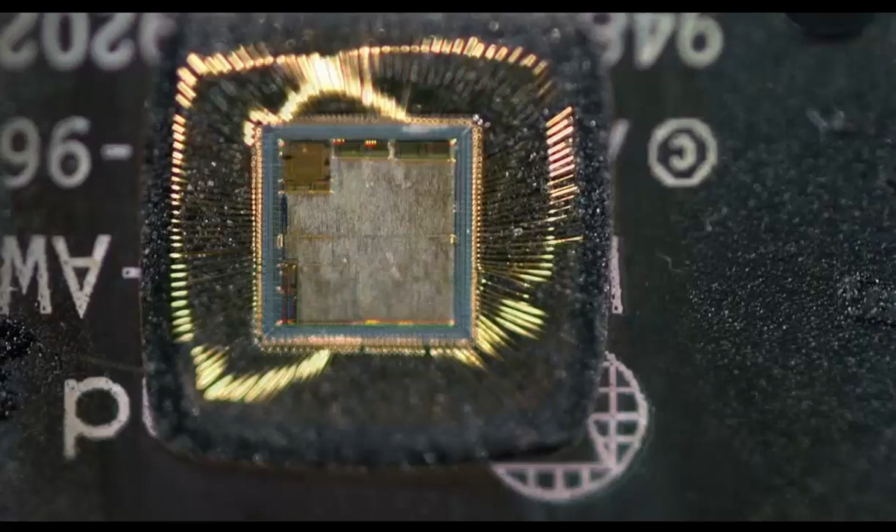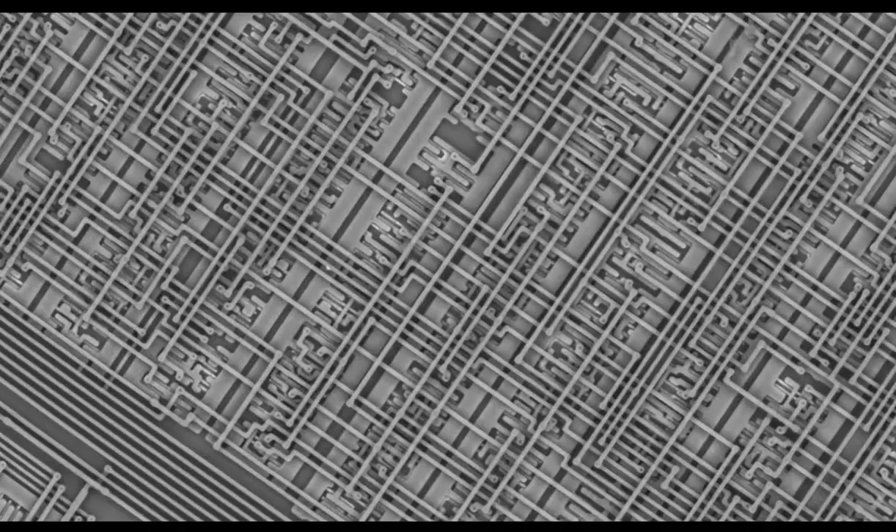In integrated circuit manufacturing today, engineers need to ensure the polycrystalline lines on the wafer are perfectly straight up. There are millions and millions of these tiny lines within a square millimeter area, and these billion-plus lines are created altogether in a plasma chamber. Today, we will introduce an experiment method to find the best equipment settings: the method of response surface.

Reactive ion etching is a microchip silicon wafer etching technology used in microfabrication. It uses chemically reactive plasma to remove patterned silicon dioxide film deposited on wafers. The plasma is generated under low pressure vacuum by a radio frequency electromagnetic field, with chemical gas vapor injected in.

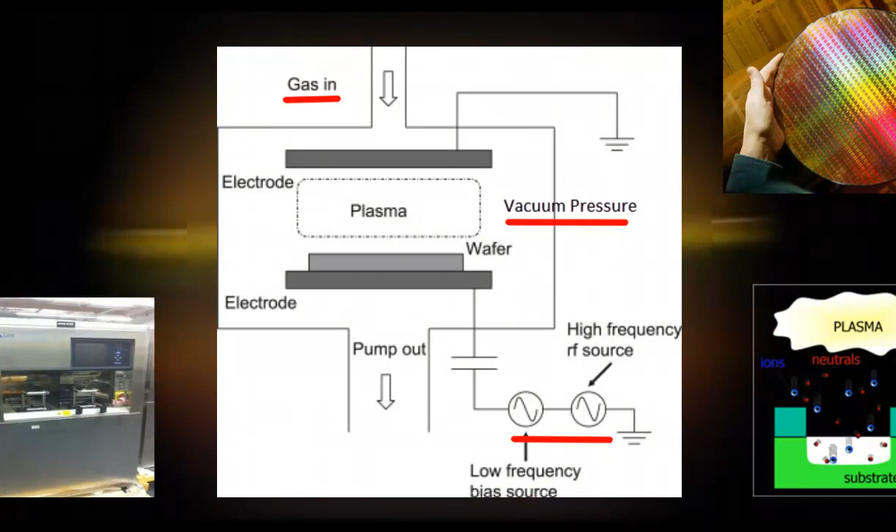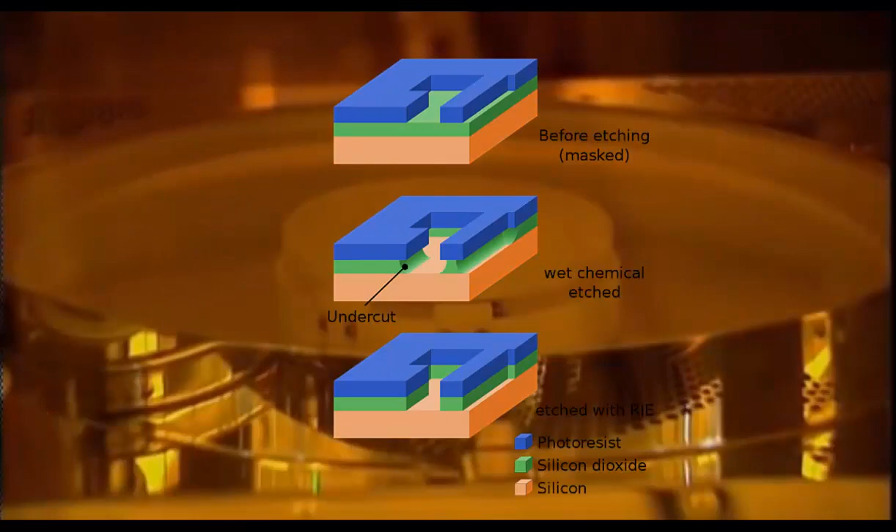The right combination of radio frequency electric field power, the pressure of the vacuum, and the hydrogen bromide gas injected into the etch chamber are the key factors leading to high-quality silicon wafers. Engineers need to ensure the profile of the polycrystalline silicon gates is anisotropic. That is, the walls of etch lines should be vertically perpendicular to the substrate in all directions, anywhere on a wafer.

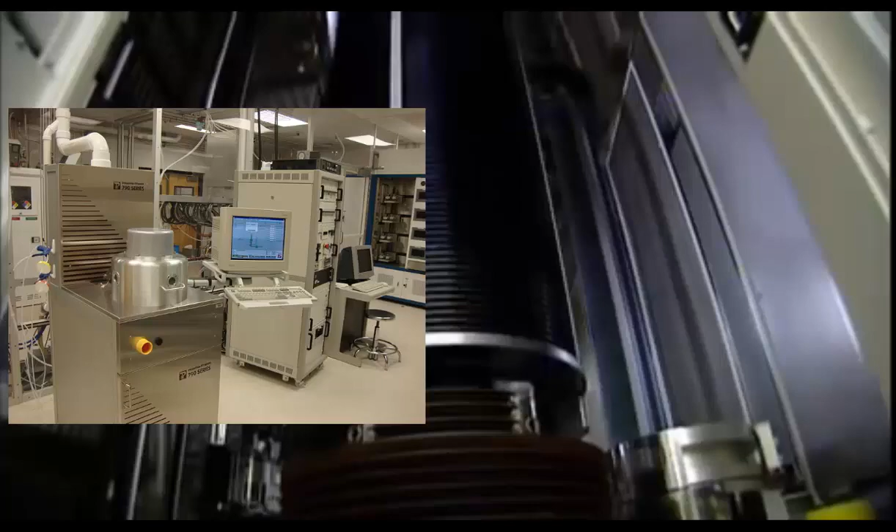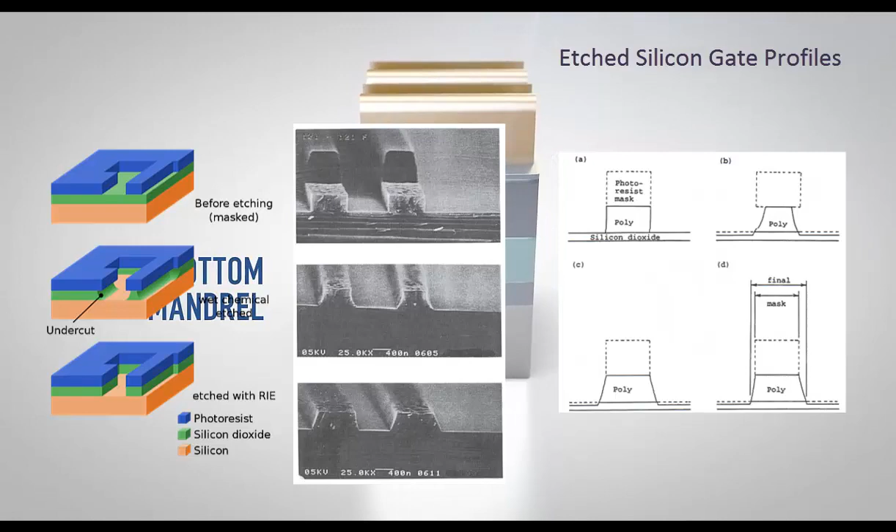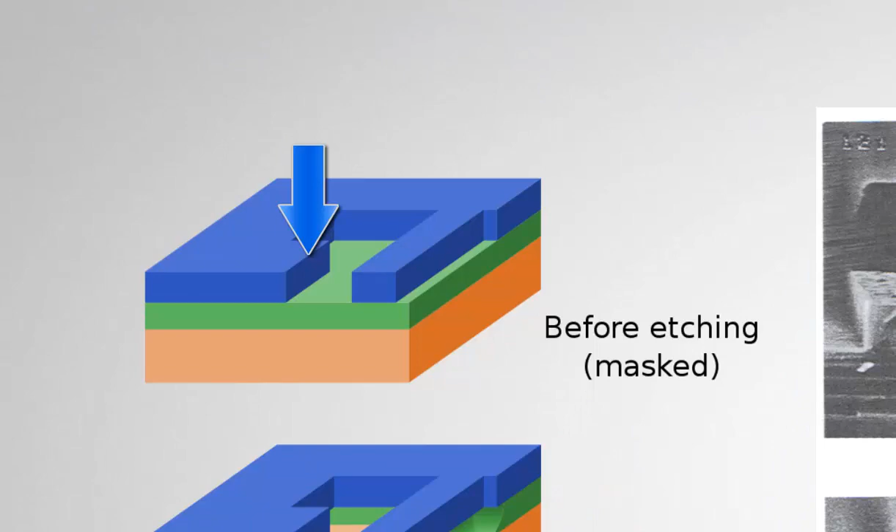Here are the cross-sections of finished polycrystalline silicon gate profiles under scanning electron microscopy. The ideal, or best outcome, is the top profile where the vertical walls are anisotropic, or straight perpendicular rising from the silicon substrate. This type of profile has the best electrical channel length distribution, and therefore the fastest microchips.

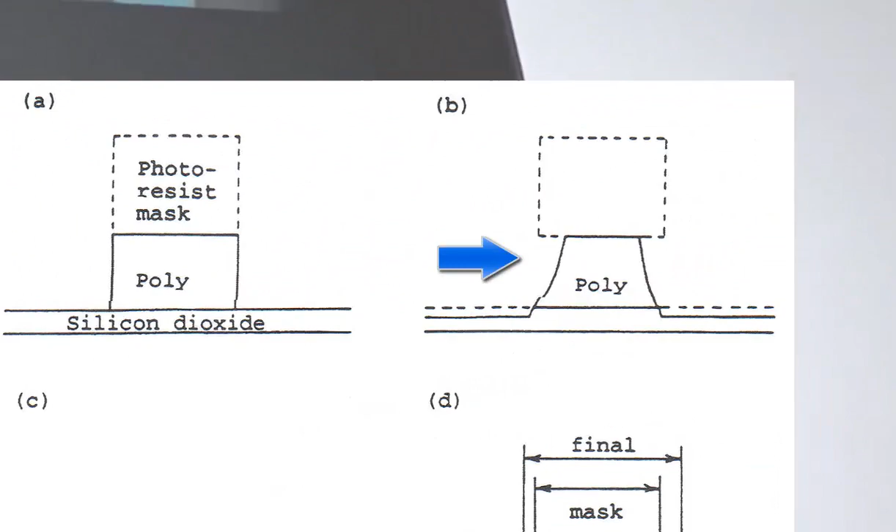The second profile came with severe undercut under the photoresist cover upon plasma etching. This undercut is a serious defect. The wafer may turn out to be scrapped if too much undercutting is present.

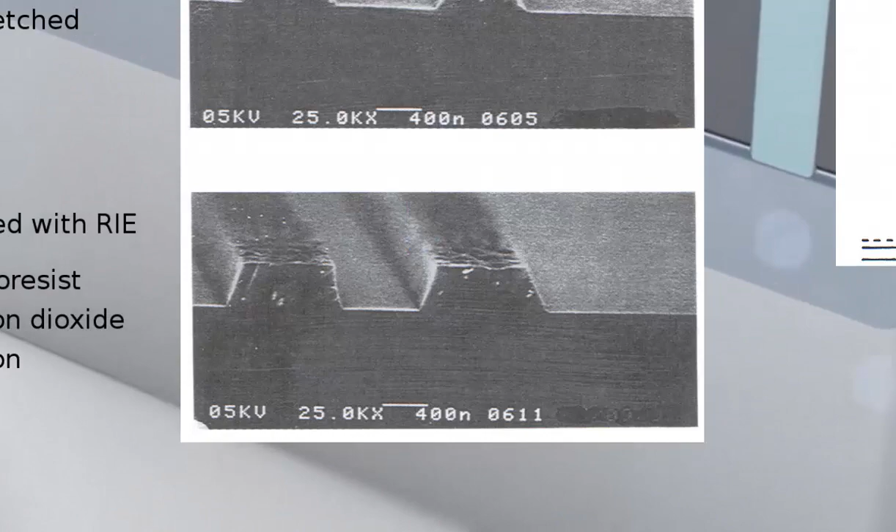The third profile has a wider base, or line growth. This defect is not as severe as the undercut, but the overgrowth should be avoided as well.

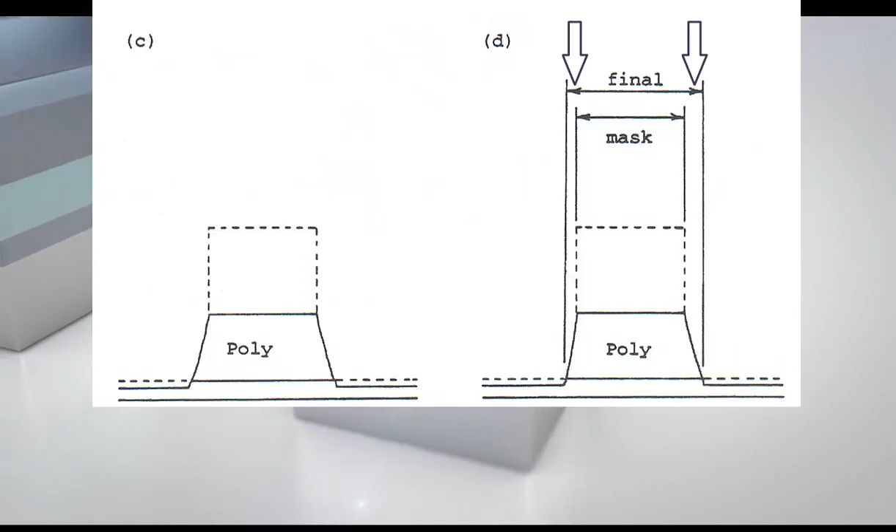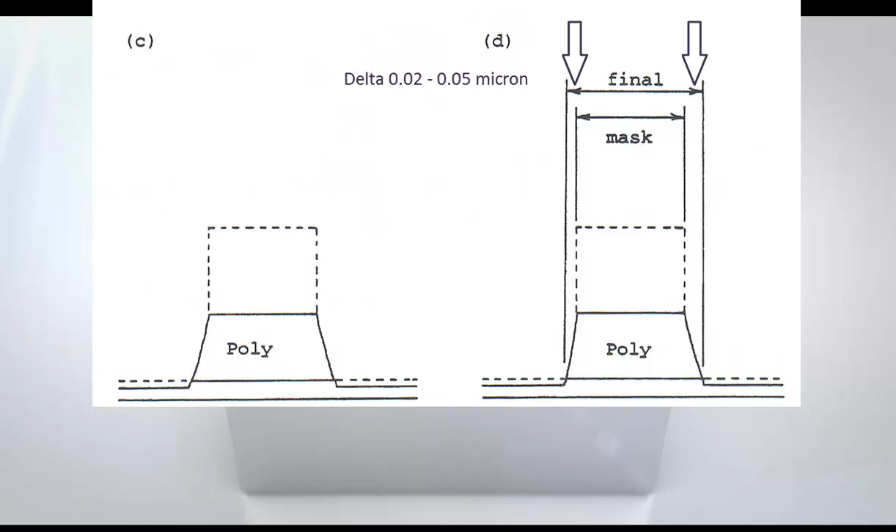The difference between the cross-sectional top and bottom line width is called delta, with undercuts as negative and overgrowth as positive values. In other words, engineers and researchers need to find the best etch equipment settings to achieve zero or slightly positive average delta values on a wafer. In practice, the ideal value is between 0.02 and 0.05 micron. Negative values are unacceptable.

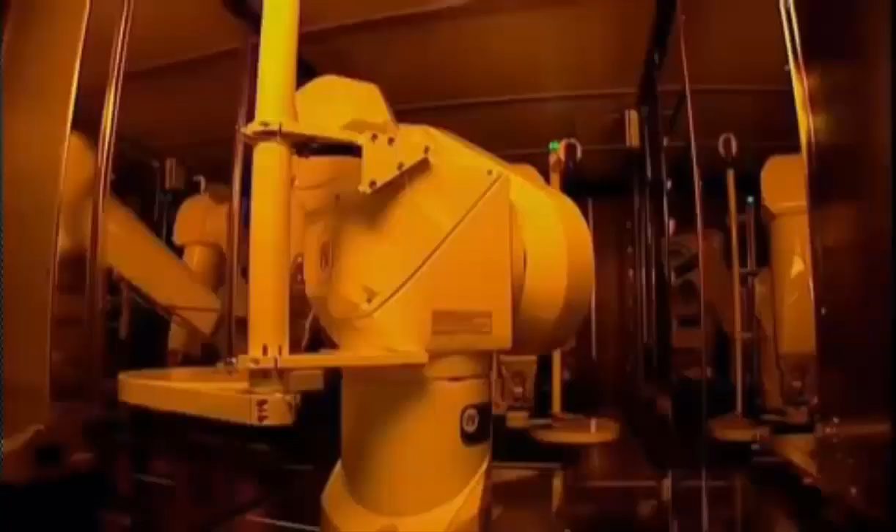Let's face it, if you do experiments, you need a design. Otherwise, you might spend a lot of time and money and may not even find a solution.

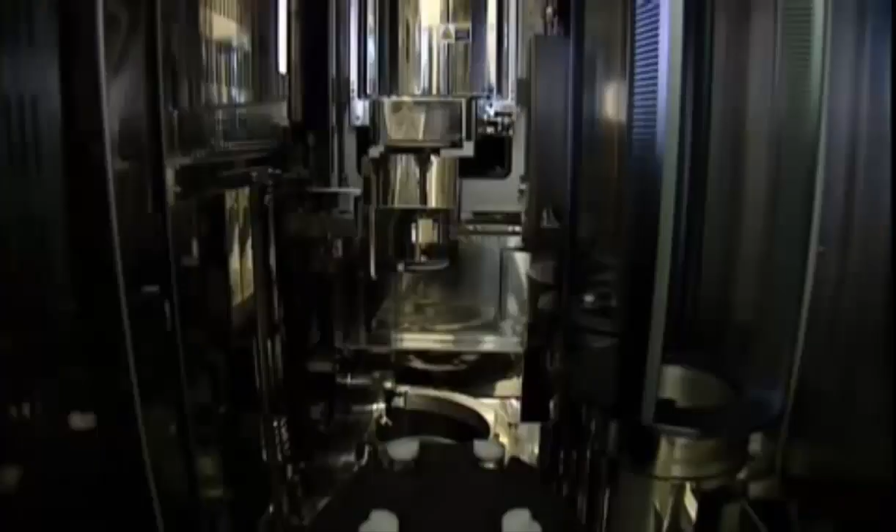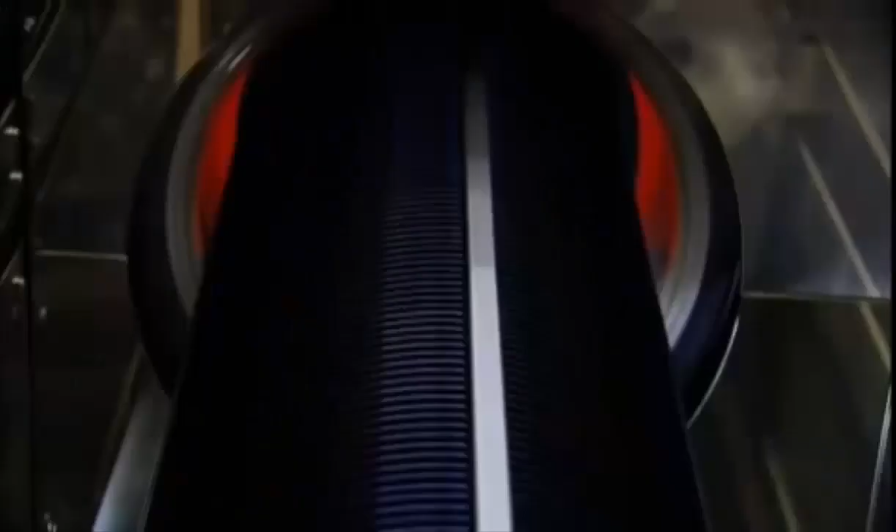Design of experiments, or DOE, is a systematic way to discover how physical factors impact outcomes. In practice, it saves a lot of research time because experiments are easier with existing lab research equipment than starting a theoretical research altogether. Almost any researcher can set up experiments, but not become an expert on something they only need once. The key here is how to do the experiment the correct way.

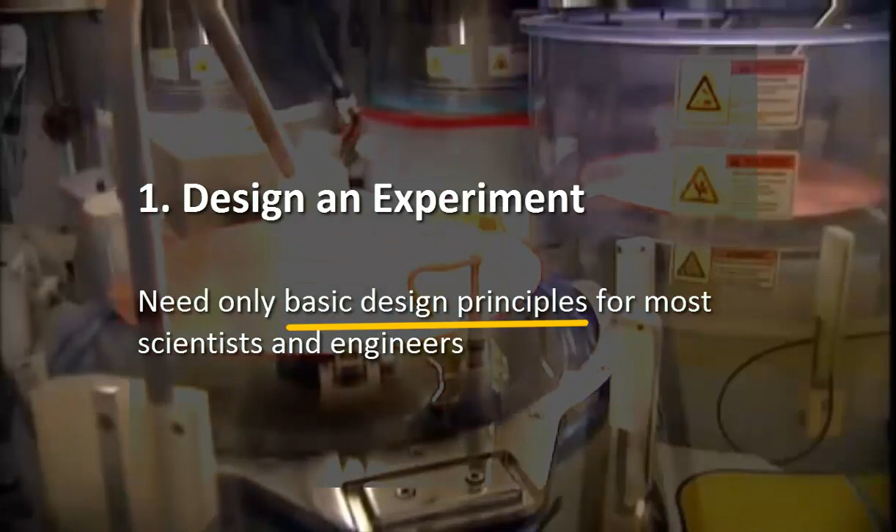There are two steps in an experiment study. First, design an experiment. Second, analyze the experiment data. For step 1, you only need to understand the basic DOE principles. There are computer programs today that help you design the right plan for you.

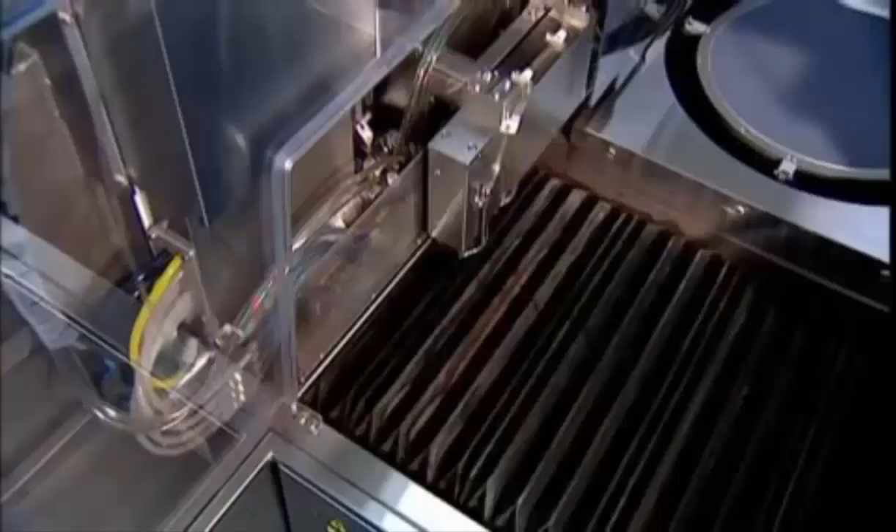For step 2, you will need some basic statistical knowledge and a good computer program to help you, such as R. Don't worry, follow my series of videos and you will gain these skills quickly. Analyzing experiment data is the same as analyzing any other statistical data. I will show you today how to accomplish this in R. We use R because it is open source and always employs the latest techniques, but you can use other computing tools of your choice.

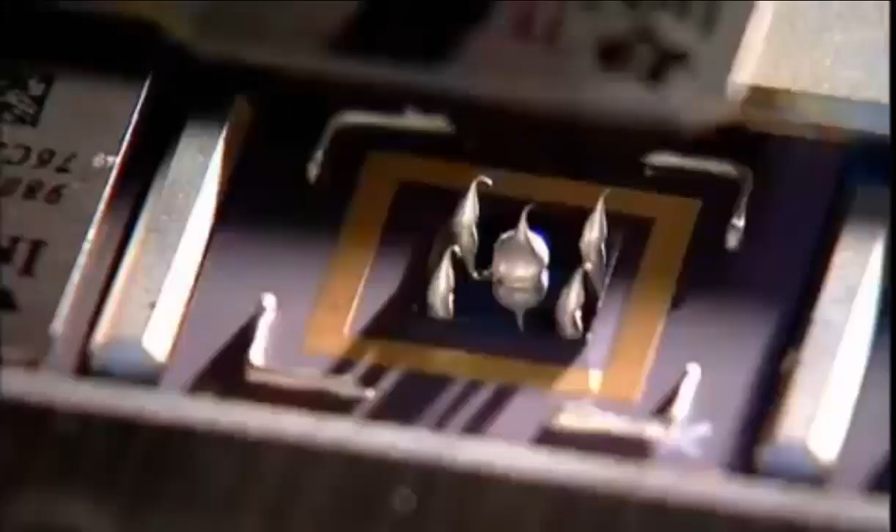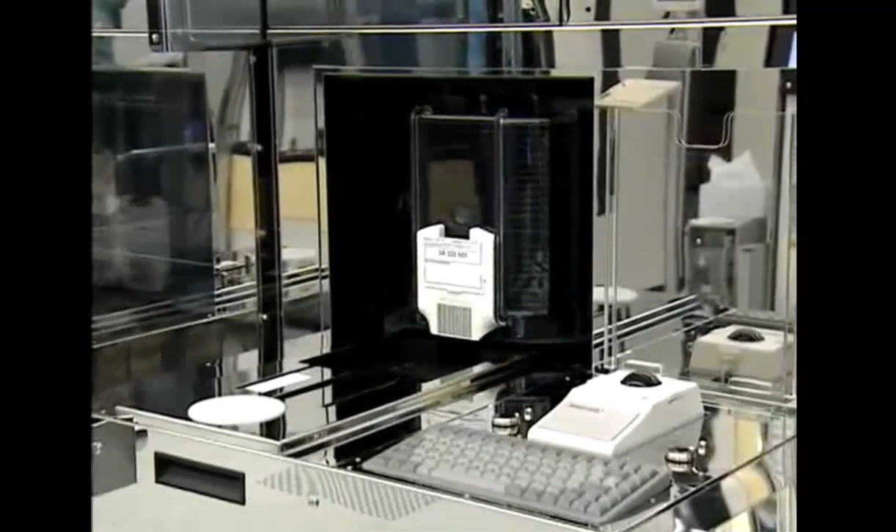Response surface methodology, or RSM, is a type of DOE. It uses a sequence of designed experiments to discover the best variable settings that lead to an optimal response or region. RSM usually starts with a first-order factorial or fractional factorial experiment to identify, among candidate variables, the ones that affect the response variable of interest.

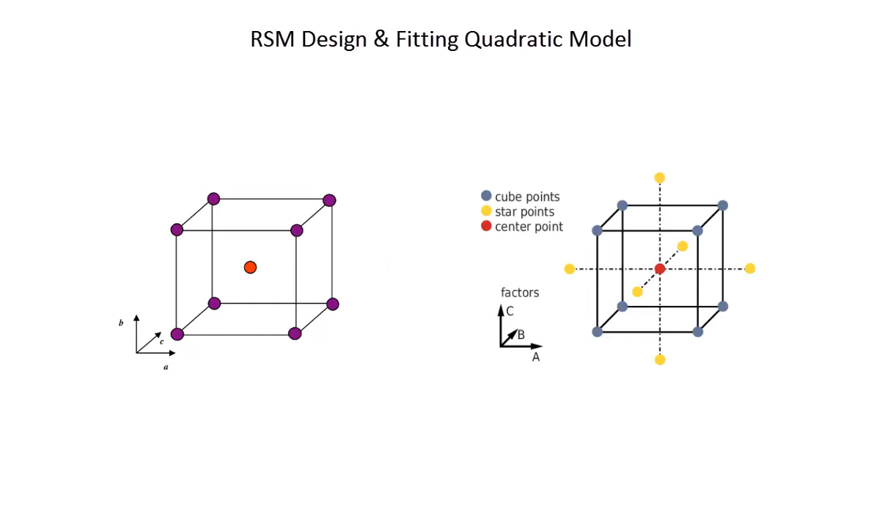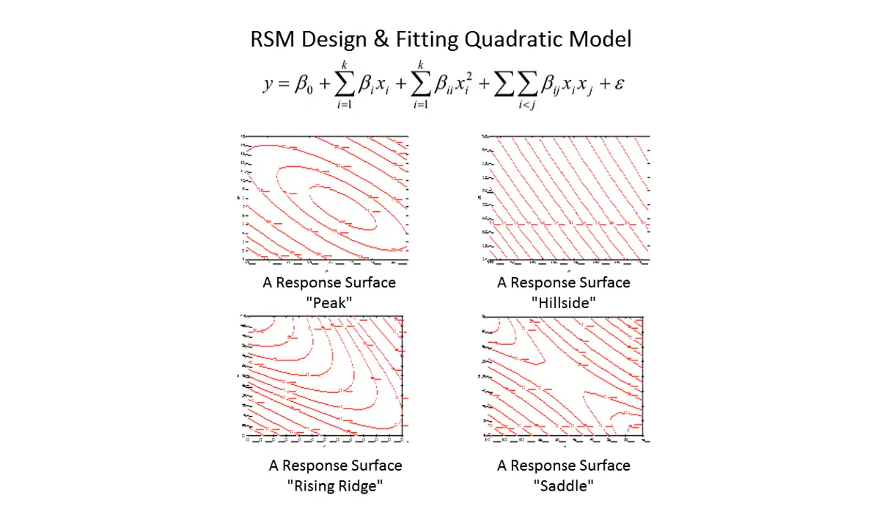Then proceed to a more complicated experiment design such as the central composite design, or CCD, where you find a second-degree polynomial model. We see here the fitted surface in the case of two factors. There are either peak, hillside, rising ridge, or saddle point.

Historically, RSM has led to huge scientific and technological breakthroughs, and is therefore considered a core industrial competency. The central composite design, along with the Box-Behnken design, are the most widely used designs for RSM.

CCD contains an embedded factorial or fractional factorial design with center points. Then, these designs are augmented with a group of star points to allow estimation of curvature. Let's take a look at this two-factor CCD design.

Engineers began with the full or fractional factorial experiment and identified two important factors, then augmented the experiments by performing on the star points along the axes. The star points represent new extremes for each factor. The combined settings become a CCD plan.

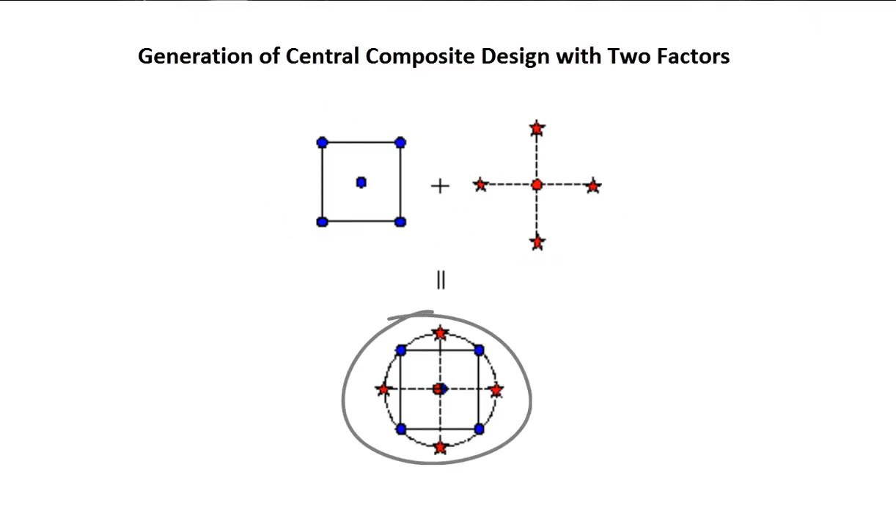Similarly, for a three-factor experiment, the final CCD is a combination of cube points obtained from factorial designs combined with star points. There are three important properties of the CCD.

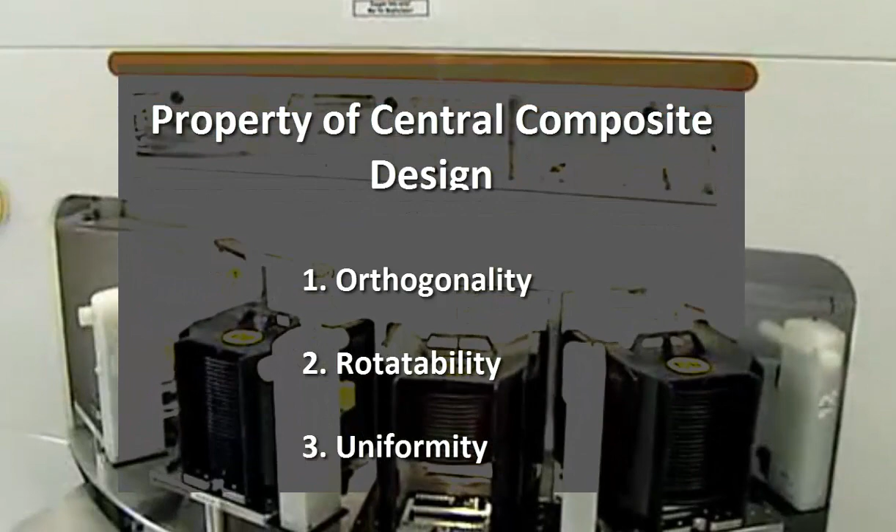They are, first, orthogonality - that is, the individual effects of all factors are estimated independently without confounding, with minimum variance, and the estimates are uncorrelated. Second, rotatability - that is, the design points are rotating about the center of the factor space. Third, uniformity - that is, the center points are uniform in precision.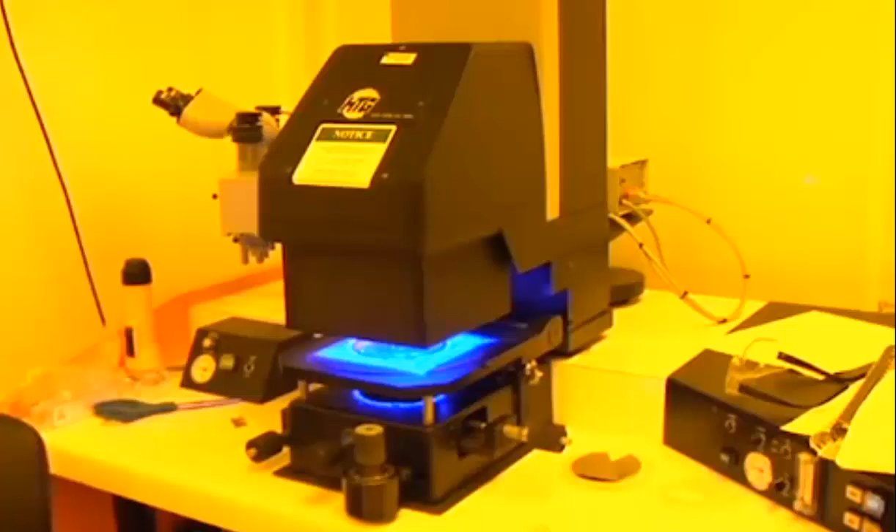For the wafer study, engineers have conducted factorial experiments and determined the factors that impact wafer line size delta. These are radio frequency electric power for the plasma, the pressure of the chamber vacuum, and the hydrogen bromide gas concentration injected into the vacuum.

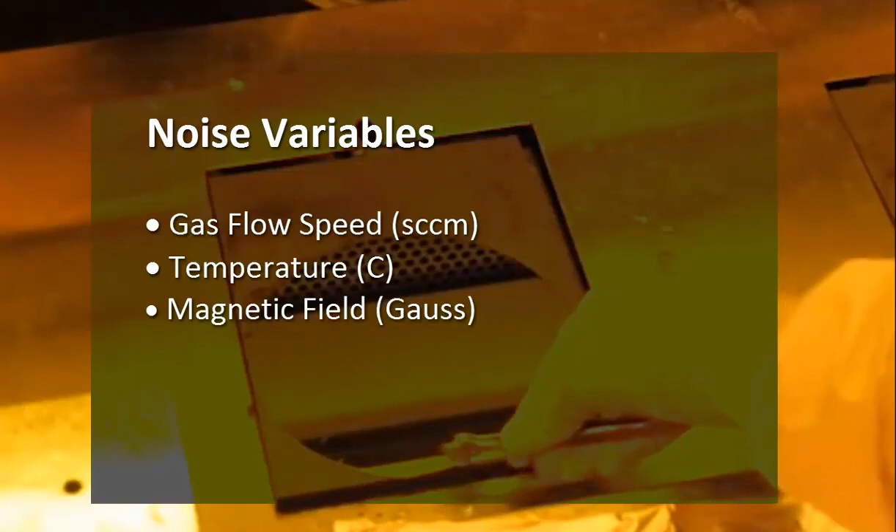Wafer feature density is also known to impact line size delta, but it does not interact with the other three factors. Other variables such as gas flow speed, temperature, and magnetic field are less significant, so will be treated as noise variables. Wafer feature density is a categorical variable; we use code 0 for low density and 1 for high density.

There is another factor, the feature proximity on a wafer, that is how close the features are positioned. For this solution, let's do all experiments on only the closely featured wafers. We will expand to low proximity wafers using a more complicated model in a future video.

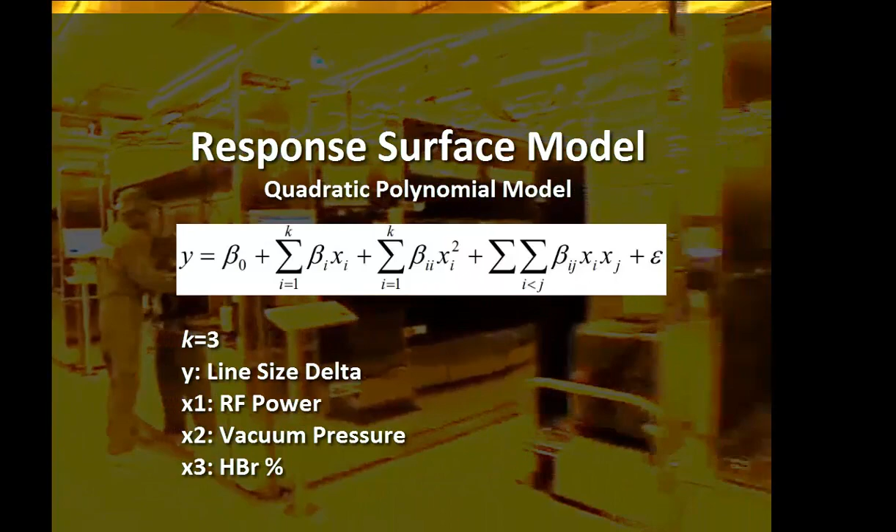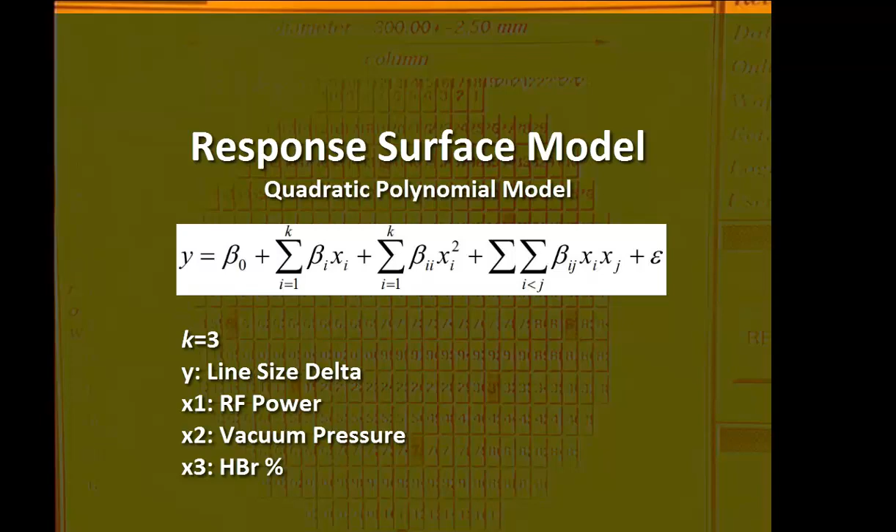The RSM model we intend to fit is the quadratic form model, with x1 as RF power, x2 the vacuum pressure, and x3 the hydrogen bromide concentration. We will repeat the design for wafers with high then low feature densities, and control feature density in the final model.

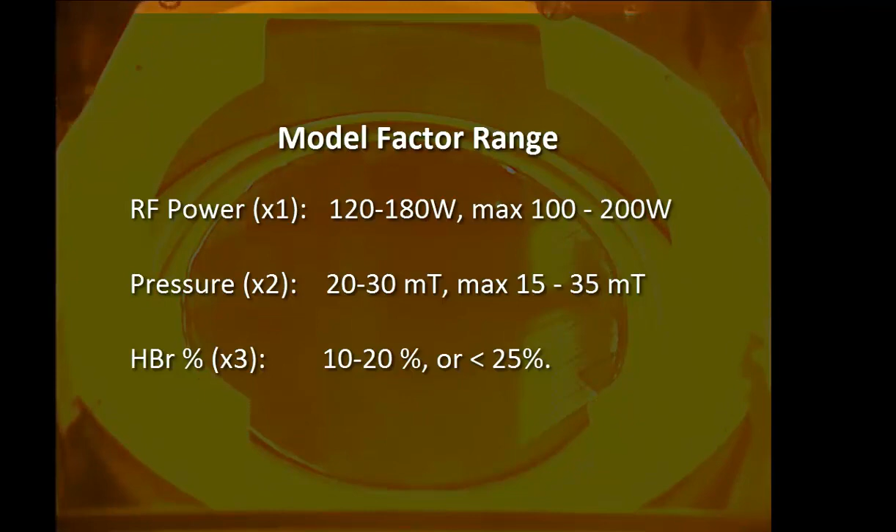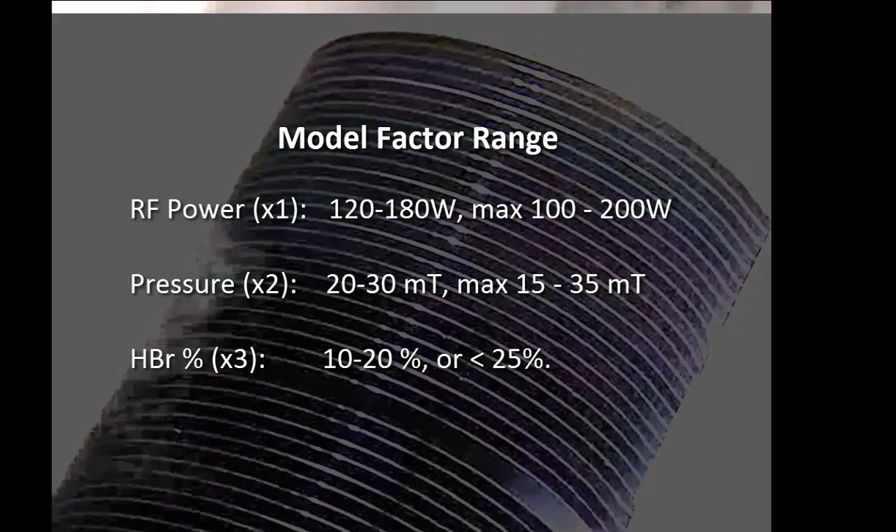The range of the factors are as follows. RF power between 120 to 180 watts, can be as low as 100 or as high as 200 watts at the extreme. Vacuum pressure is between 20 to 30 millitorr, can be as low as 15 and as high as 35 millitorr. Hydrogen bromide concentration should be between 10 and 20%, and will tolerate up to 25%.

We will create the CCD plan and analyze the experiment data using R. Let's open R Studio.

Step 1: we need to create a central composite design. We use the RSM package; if you have not installed it, download a copy from the R Cran repository. We can use the CCD function from the RSM package. We first specify a model formula, only needing to specify response and design variables, then the number of center points in the cube blocks and star blocks. As we run all in one block, we have 4 and 0 here, no repeats on the star block.

We need a rotatable plan. We also need to specify how the plan will convert the input variables from the original to the coded variables. To convert to coded -1, 0, 1 values, we subtract the mean from the variable, then divide it by half of the range. Yes, we want randomized run order - say true. We also want to run all experiments in one block.

Take a look at the final design. In each design, values of line size delta are missing. We will proceed to hand the plan to engineers to conduct the experiment.

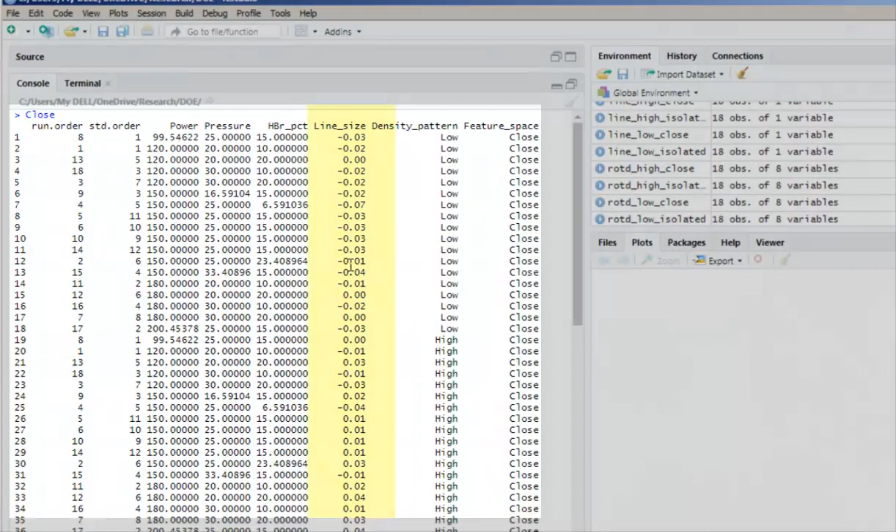Wafer lab engineers conducted experiments, saved data in the design plan column line size, renamed the dataset to close. We use the RSM function to analyze the collected data.

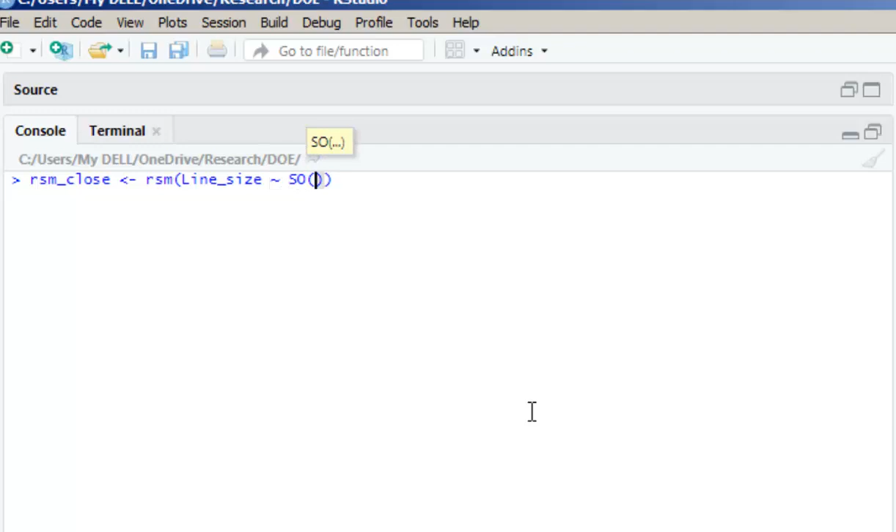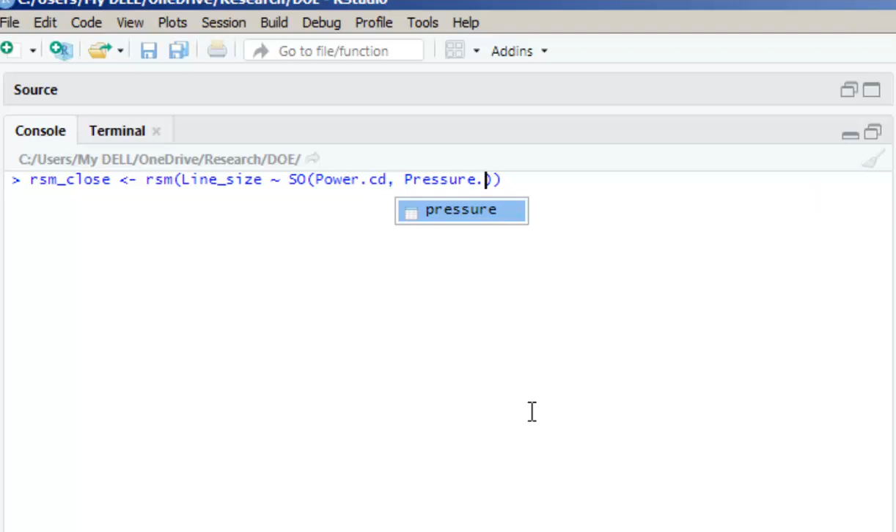What the RSM function does is feed the experiment data to a linear model of your choice. Any statistical techniques required to fit the right linear model apply here; we'll go into more details on that in a separate video. But here, we have found the quadratic model with the control is a good or close to good model after some explorations.

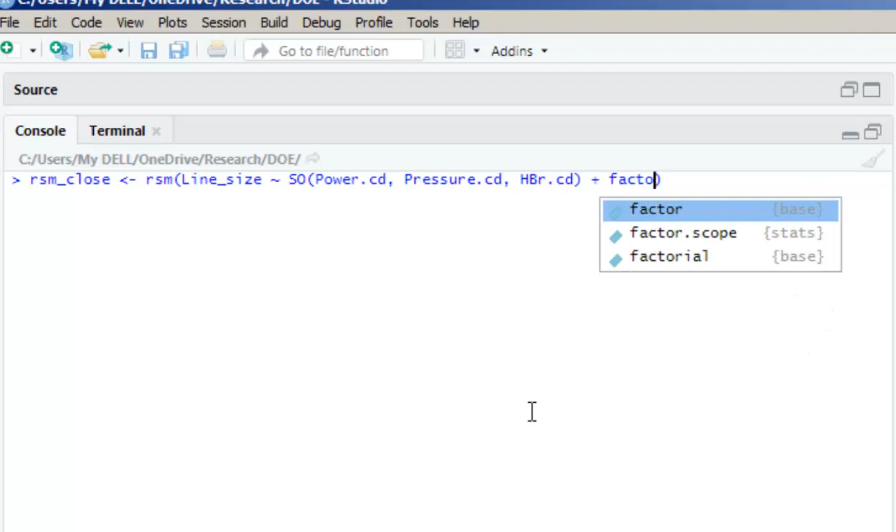We first specify the model formula, the response variable, then the SO function for the quadratic form with 3 design variables: power, pressure, and hydrogen bromide concentration. Make sure you use the coded version of the variables, not the original. Then we add the categorical feature density indicator outside the SO function quadratic form, and tell the name of the data frame. There you go - take a look at the fitted results.

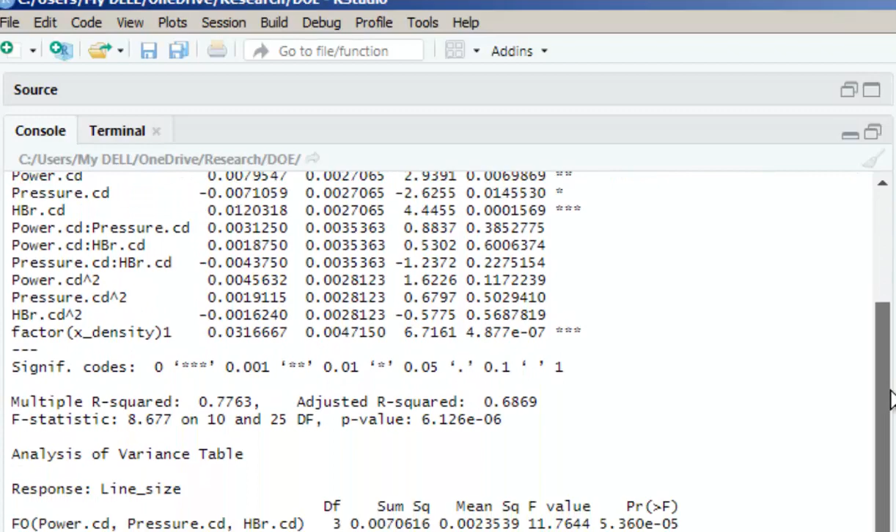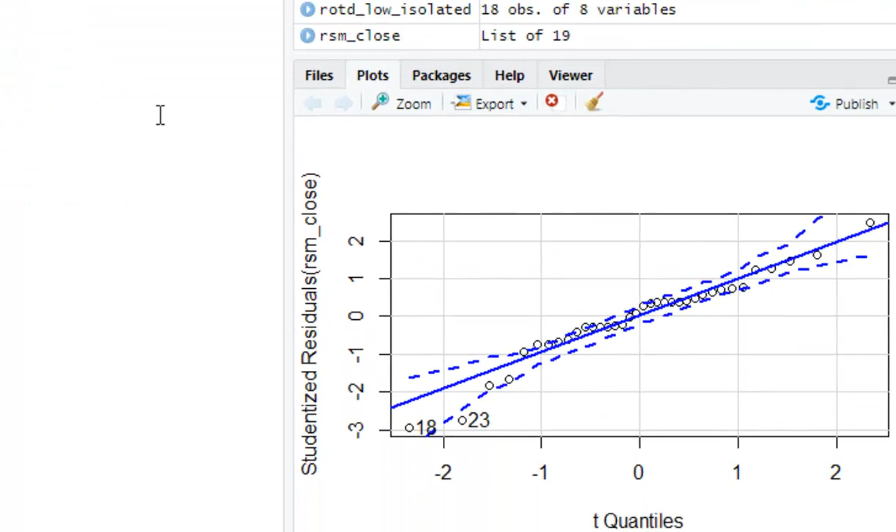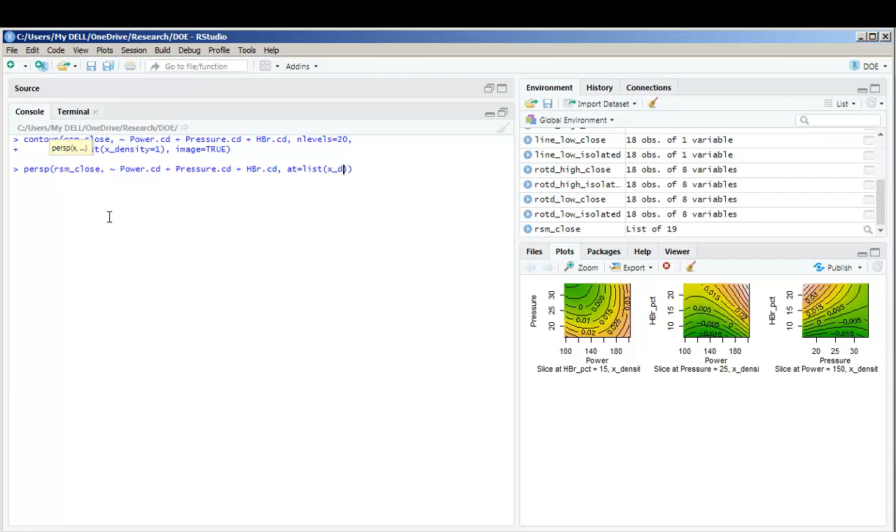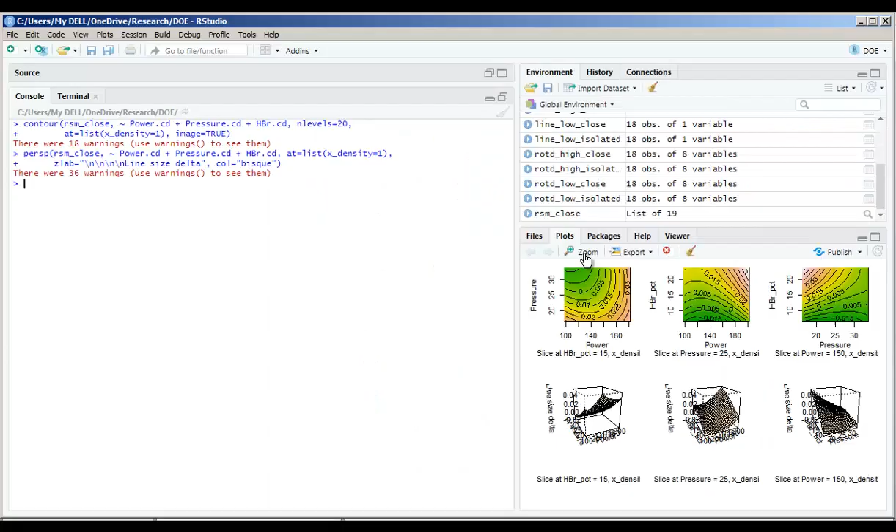Here are the fitted response surfaces, 2 factors at a time, with the third at its mean level and feature density at a high level. We could locate the operating regions visually.

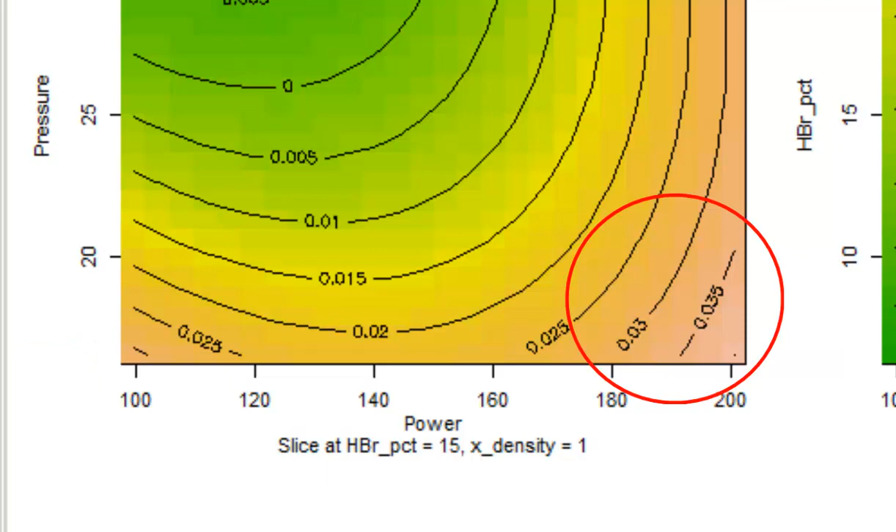Surface area matching our ideal average delta between 0.02 and 0.05 micron corresponds to power settings between 180 and 200 watts. The vacuum pressure should be near the lowest levels, around 17 millitorr, and the hydrogen bromide concentration should be near the highest regions, between 20 to 25%.

We should avoid any region that leads to 0 or negative delta, where H-line undercuts are prevalent. The curvature low is in this region, therefore it should be ignored.

Since the overall trend is positive monotonic for delta versus power and hydrogen bromide concentration, and negative versus pressure, as seen in the 3D plots, we should conclude the higher the power, the lower the pressure, and the higher the concentration of hydrogen bromide gas within the allowable limit settings will result in the best delta value between 0.02 and 0.05 micron.

In this RSM study, we investigated the etching equipment settings that will lead to the best wafer line size through experiments following a central composite design for RSM. With this discovery, we're well on our way to produce the best quality microchips.